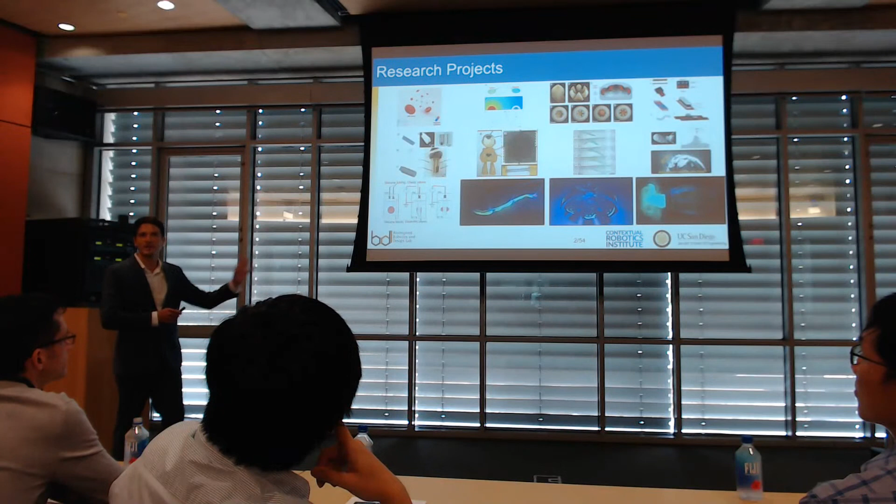I found fluorescence to be an interesting research tool, and also it's kind of captivating. So if I was an artist, this would be my fluorescent period, which is what we're going to be talking about today.

All right, so why soft robots? Why soft swimming robots? If you want to study something underwater, it's often dull, dirty, or dangerous to send a diver there. So instead, many times we opt to send robots, such as autonomous underwater vehicles, or AUVs, like this one in yellow on the left, or ROVs, remotely operated vehicles, like this one on the right. This allows us to send a robot instead of a person to do jobs that are too dull, dirty, or dangerous for people to do themselves.

The trouble with sending these big AUVs and ROVs is that they're made out of rigid materials. They can be quite large, and they're often driven by propellers or jet thrusters. Some of the challenges with these are that the propellers, for example, could get entangled on kelp or tethers. They could also cut marine life. If they run into something moving at a high rate of speed, they might damage or crack a coral reef. So we're looking at bioinspired actuation approaches to eliminate the need for jet propulsion or propellers, to try to obviate some of these problems.

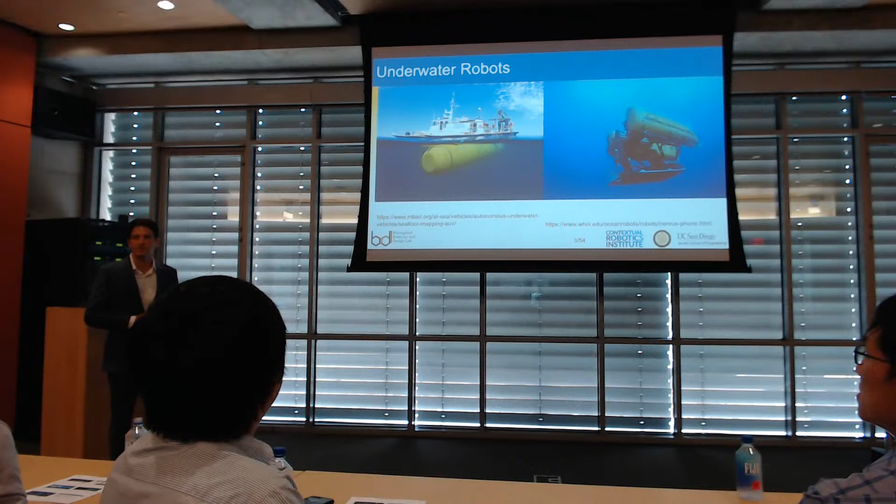It pumps fluid into the arms of the jellyfish and causes it to swim through the water. A lot of soft robots are based on hydraulically or pneumatically actuated robots. Some of the challenges with these are that you need a pump on board, which can take up size and weight, and consumes a lot of power. They can also be quite noisy, making a lot of noise and vibration.

So if you want to study something underwater that is sensitive to noise, if you're trying to measure acoustic signals underwater, or if you're trying to sneak up on a fish, if you have something with a pump running, you might scare it off before you get close to it.

So we looked at three different animals to serve as inspiration for our robots. The first is the eel. Eels are able to swim for a long period of time because they don't use a lot of energy while they swim. What's interesting is, would anybody believe that there are transparent eels? Have you seen a transparent eel that you can look right through? If you don't believe me, I'll show you here in a little bit.

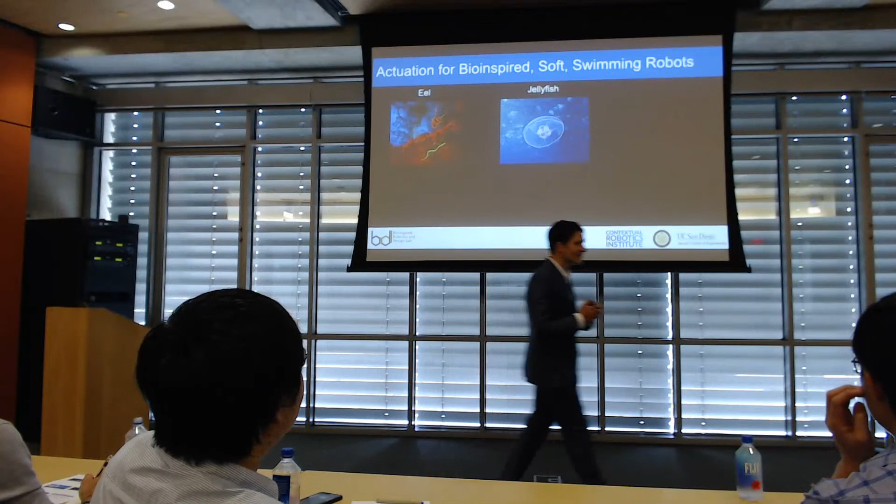So what about, does anybody know what the fastest swimming animal is? The fastest animal? Shark? No. Oh, let me clarify - what is the fastest invertebrate? There's like three choices, and I've already hinted at the animals we're talking about. Squid, that's right.

Or cephalopod - I'll generalize and just talk about cephalopods. The squid is the fastest invertebrate, and there's a few ways it does it. If it wants to swim using jet propulsion, it will hyperinflate its body to suck in a bunch of fluid, and then it will squeeze out the fluid, doing this in intermittent bursts so it can swim through the water.

It also takes advantage of the added mass effect, which means that as it hyperinflates it gets bigger, and as it squeezes out water it becomes smaller. So you get an acceleration where you can change the size of your body while you swim. We'll talk about that here in a little bit.

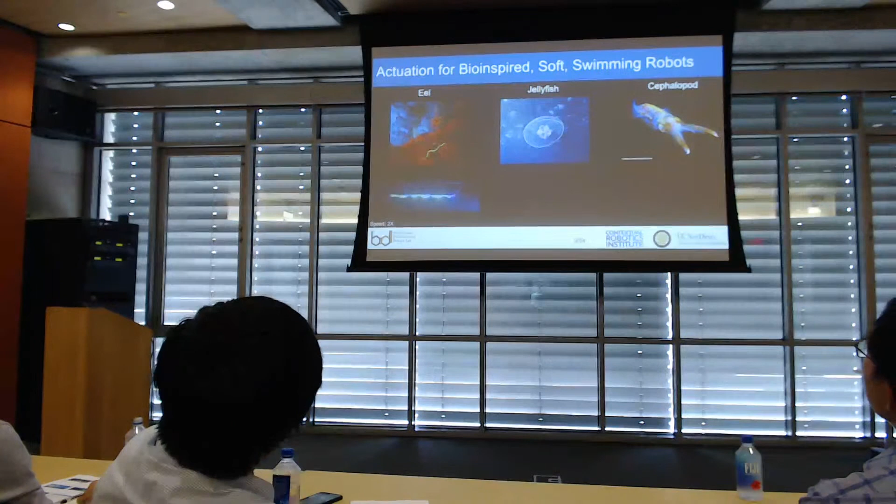So those are the inspirations for these three projects. We have the eel-inspired robot I talked about, the jellyfish-inspired robot I'm going to talk about, and lastly our squid-inspired robot.

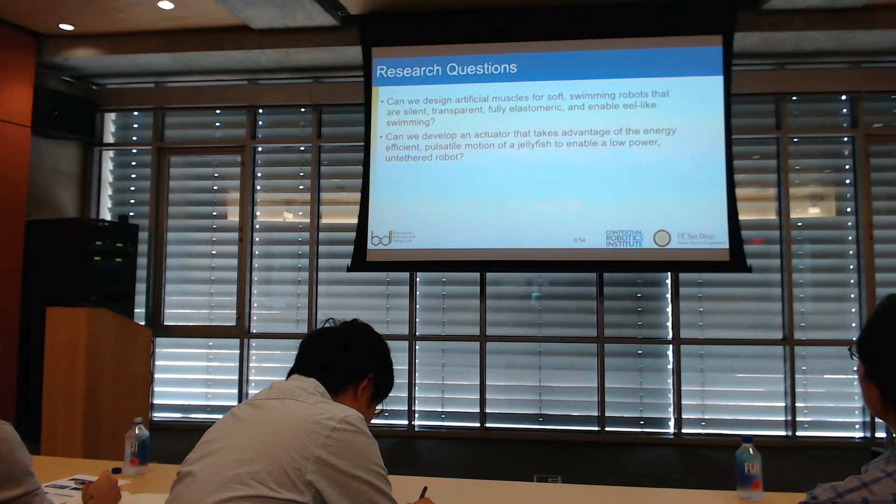The questions that I had are: can we design artificial muscles for a soft swimming robot that are silent, transparent, fully elastomeric, and enable eel-like swimming? Can we develop an actuator that takes advantage of the energy-efficient pulsatile motion of the jellyfish to enable a low-power, untethered robot? And can we demonstrate an actuation strategy for a squid or cephalopod-inspired robot that takes advantage of both pulsatile jet propulsion and the added mass effect?

I'm going to go into each of these here in a moment. If we want to make artificial muscles for soft robots, we want to use a type of actuator that has similar properties.

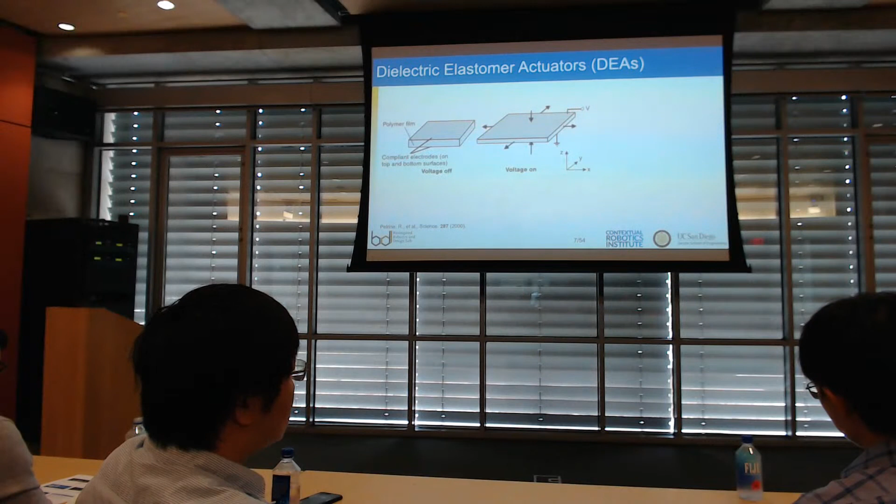The actuator that we chose is called the dielectric elastomer actuator, or DEA. It works like this: a DEA is a rubbery film, so it's an elastomer. On the top and bottom of the film you have conductive compliant electrodes. As you apply a voltage to the film, electrostatic forces compress it, so it becomes thinner. It also increases in area, so it becomes thinner and more spread out.

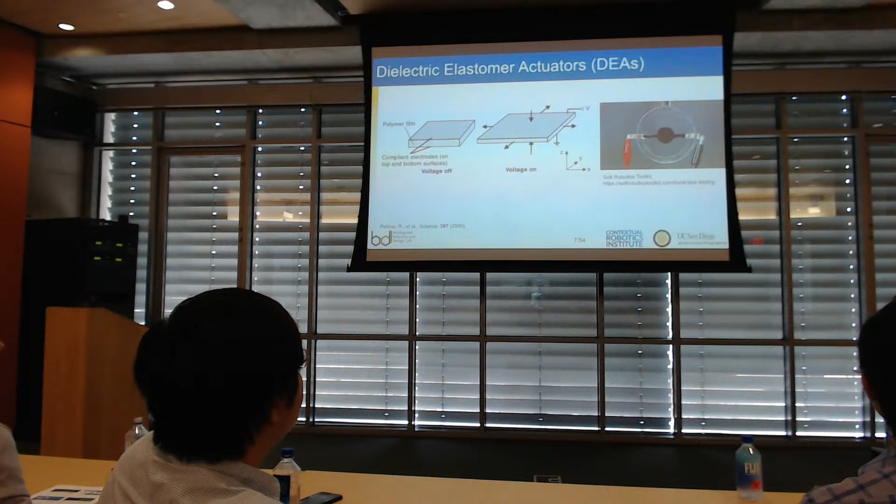Here's a video of one of them working. The transparent section around the outside has a rigid ring, and then there's a transparent film, and the black part is where the electrodes are. They're applying a voltage of maybe 5,000 to 7,000 volts to get this actuator to move.

The pressure that you can generate with these actuators goes as epsilon r, which is the permittivity of the material, times epsilon naught, which is the permittivity of free space, times the voltage that you apply divided by the thickness of the actuator squared.

The strain that you get, the amount that it moves, is equal to nu, which is the Poisson's ratio, the ratio of how much it deforms in one direction, times the same components we talked about earlier, divided by the Young's modulus.

So this shows that if we want large pressures or large strains, we have a few different variables to work with. The first one is the permittivity of the material, so we can select a material that has a high permittivity. The materials we're working with range anywhere from 2 to 4.7.

The voltage that we apply - you'll also see that voltage and thickness are squared, so there's a higher dependence on the voltage and thickness of the material than on the permittivity. But the voltage you can apply is limited by the breakdown strength of the material - how much voltage it can take before it sparks and breaks down.

Then there's the thickness of the material. The materials we work with are usually anywhere from 50 microns to a millimeter in thickness. The Young's modulus is something else we can select for.

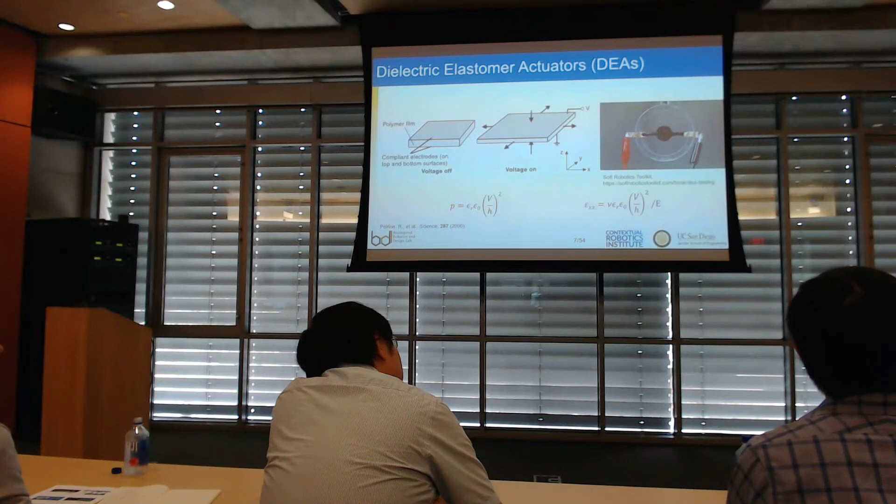If we want to make something like a muscle, we can compare different types of actuators to natural muscle. One way is a qualitative comparison across these categories: strain, actuation pressure, density, efficiency, and speed of response. Natural muscle is rated as good across all these categories.

If you look at other types of actuators people use, like electromagnetic, it's good for strain and pressure - you can get a lot of pressure with motors, for example - but they're very heavy, so they're very dense. They also work better at high speeds than low speeds, so they're not as efficient across a broad range of speeds like natural muscles.

But if you look at dielectric elastomers, they have similar performance to natural muscles. So it's a good choice for making artificial muscles for soft robotics.

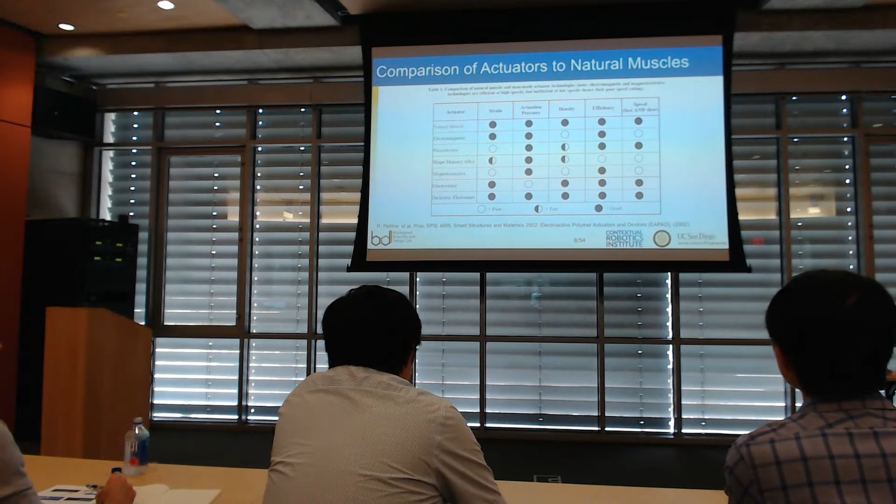If you take a rubber band and stretch it, this is what the force as a function of stretch would look like. On the y-axis we have force, and as you apply more force, it starts stretching out more and more. It doesn't take a whole lot of force to stretch out a rubber band until you get toward the end, or the stretching limit of the rubber band.

At low stretches, one way of thinking about this is if you have two balls of chain with a spring in between. As you pull on either end of the chains, you're just unraveling each ball of chain, which doesn't take a lot of force. Once you get to the spring and it becomes taut, it takes more force to pull the spring apart.

That's one example of how to describe what we're seeing here. It's very easy to pull at low strains, then as you get farther apart it takes more force as you're pulling its covalent bonds.

For these actuators, remember the pressure goes as the inverse of the thickness. So what's happening is that if you apply a constant voltage, you're generating a feedback loop - as you apply a constant voltage, you're making the actuator thinner.

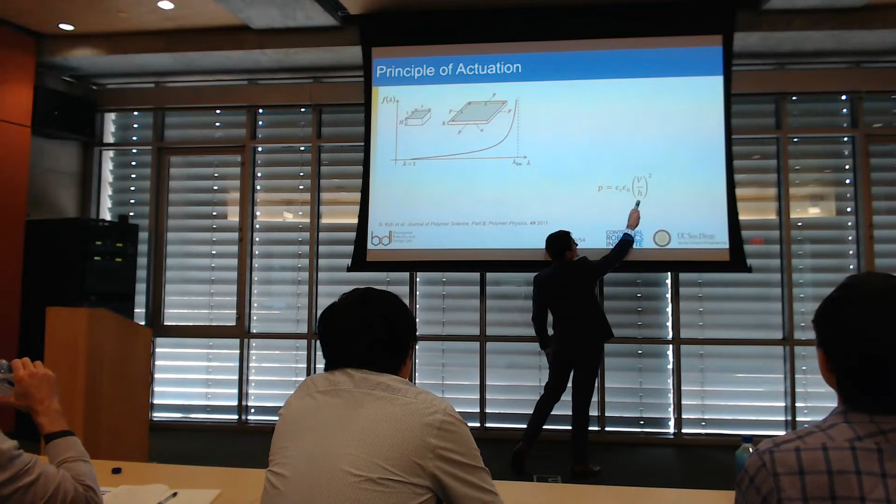So if you apply a constant voltage, you're generating a pressure, which makes the thickness thinner, which then increases the pressure, which then increases or decreases the thickness even more. So you're generating this positive feedback loop. And so then the curve, if you plot the voltage as a function of the stretch of the material, it looks more like this. It takes a certain amount of voltage to get it to deform a little bit, and then after a certain point, it'll start feeding back.

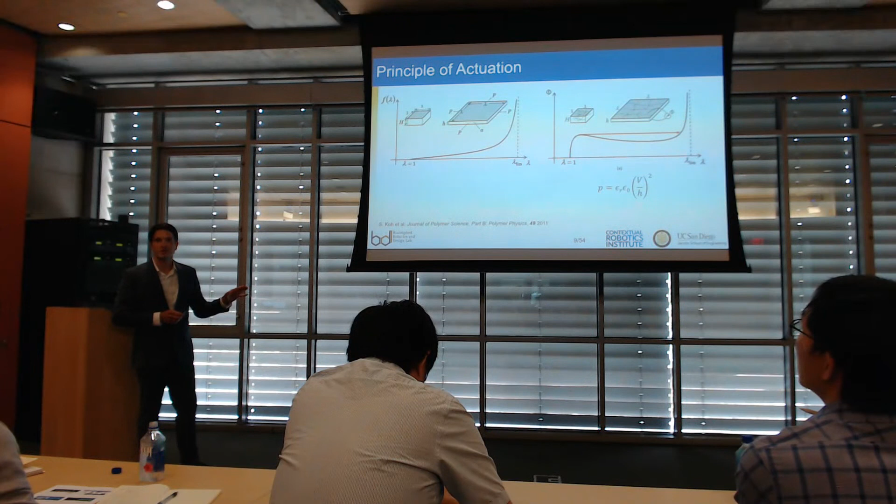But then researchers found that if you stretch the material ahead of time, you can change when the material will break down, and you can get improved performance by it. The challenge is that once you stretch the material, you need to apply it to a rigid frame. If you apply it to a rigid frame, you can get better performance from your DEA, but then you no longer have a soft robotic option, because you have some plastic or metal implements in there too. So we're trying to look at ways of getting large actuations from these actuators without using pre-strain.

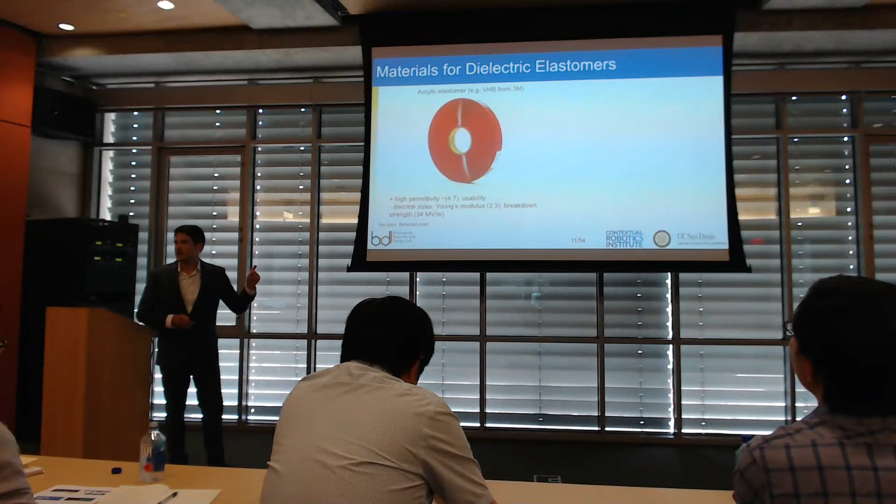So the two materials that people normally use for DEAs: one is an acrylic-based elastomer, and a very popular choice is VHB. It has a high permittivity, and it's also very easy to use, so it comes on a roll. I've got some examples of it over there. But the challenge with this material, even though it's widely used, is that it comes in only discrete sizes, so you can only get it at a few different thicknesses. It has a high relative Young's modulus and a low breakdown strength.

On the other hand, other people choose to use silicone-based elastomers, so this is PDMS. Many groups use this for microfluidic chips, and you can also use it for DEAs. With PDMS, you have better control over the thickness, because you can spin coat it and get really thin layers. It also has a lower Young's modulus, so you can get higher stress or strain rate, and it has a higher breakdown strength, so you can apply more voltage when you're trying to actuate it. The trouble is that it has a lower permittivity, almost half as much as VHB. So in our work, we are focused mostly on VHB because it's very easy to prototype with, but for further improvements, we might move to maybe more silicone-based.

Okay, but we forgot the units on the left here, right? So this is also megapascals? Yes, that is true. That's the type of thing. Yeah.

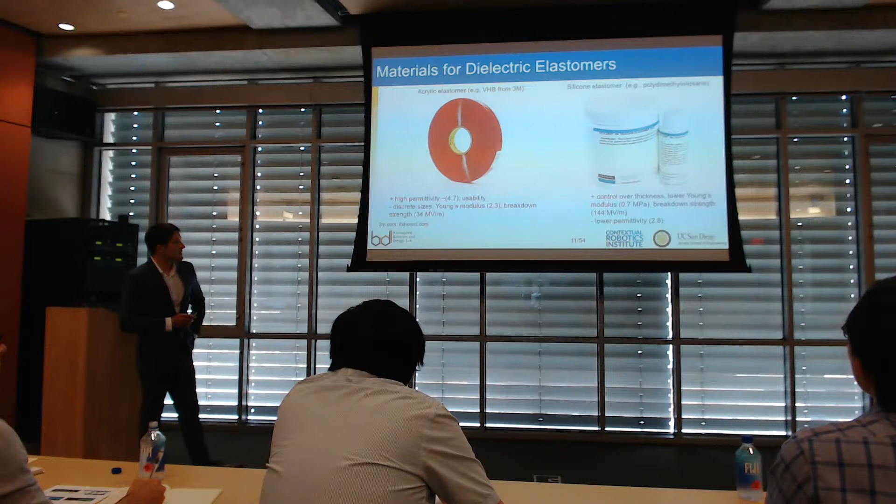Instead of carbon-based electrodes, another issue is that if you want to make something that swims underwater, you need to encapsulate it from the surrounding water, or else it will short out. So many groups use carbon-based electrodes for DEAs but have to add an additional encapsulating layer on the outside to keep it from shorting out to the water. With carbon-based electrodes, you generally get a stiffer structure.

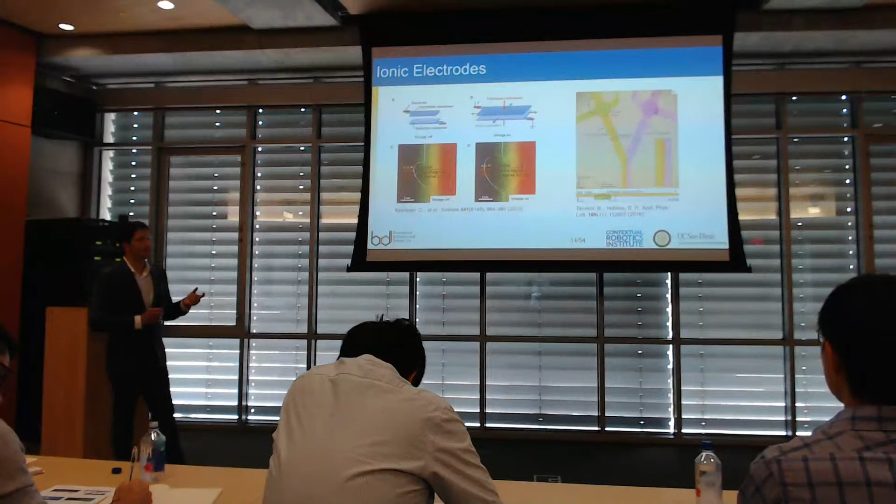We wanted to see if we could make a soft robot that would be transparent like the eel. So instead of using carbon electrodes, we use ionic electrodes. One example from Harvard uses an ionic hydrogel to show high-speed actuation. Another group used water as the electrode in a microfluidic strip to apply electricity. But up until now, nobody's used water as electrodes in a robot.

I told you this question at the beginning, so I'd like to show some of the hypotheses we're trying to test with this robot. First, that we can use water for both electrodes in a DEA. At high voltage, we can even use pure or nearly pure water to be conductive enough for actuation in a DEA. And that DEAs without pre-strain can generate enough force and strain to enable underwater propulsion.

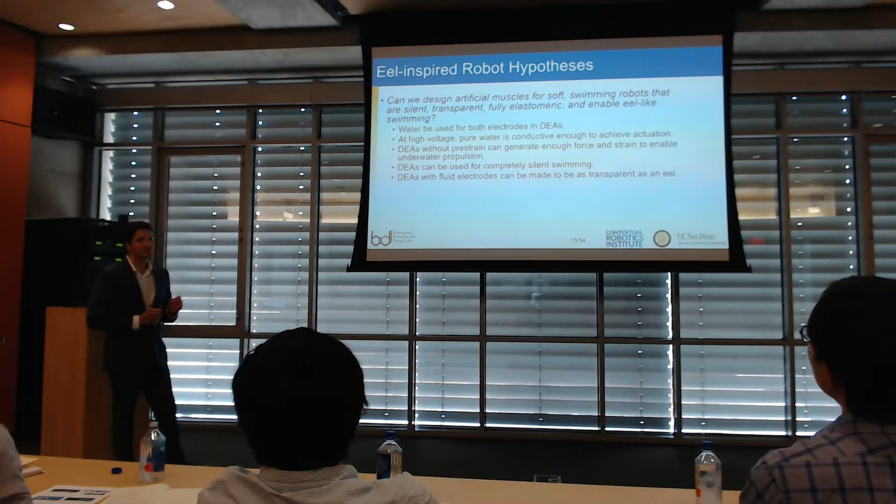DEAs can be used for completely silent swimming, so you won't have the motor noise you'd get from an ROV or AUV. DEAs with fluid electrodes can be made as transparent as an eel. And lastly, for fun, transparent fluid electrodes can enable fluorescence.

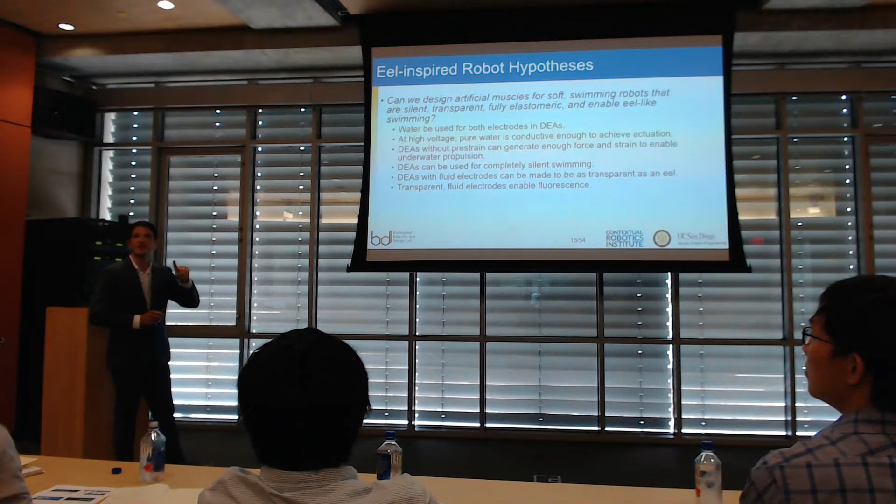Also, if you notice it's shaking, it's because the construction is vibrating the projector. So it's not you, it's the projector.

Lastly, a series of bimorphic DEAs can generate eel-inspired undulating locomotion. So how do we do it?

I made a bimorph actuator for the eel-inspired robot. The bimorph means it can bend in two different directions. We put this in a tank of water that's grounded, connected to ground. Then we have fluid pouches inside this actuator. In green here, this is water, and there are 3 layers of a dielectric elastomer.

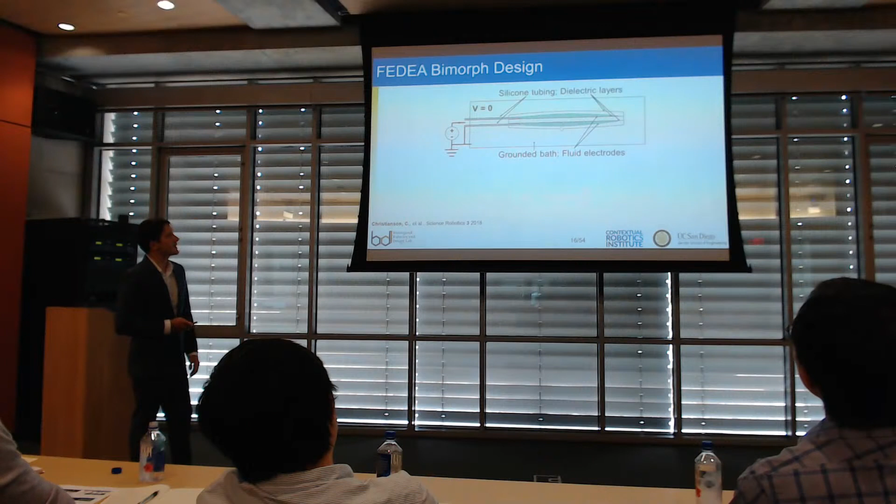As we apply a voltage between one of the pouches and the outside water, it will compress the actuator on one side and cause it to bend that way. Or we can apply the voltage to the other actuator to bend the other way.

To test this, we put it on a simple test stand and applied voltage to guide its movement. We can control the direction of bending based on which pouch we apply voltage to, and control the magnitude of bending based on the amount of voltage applied.

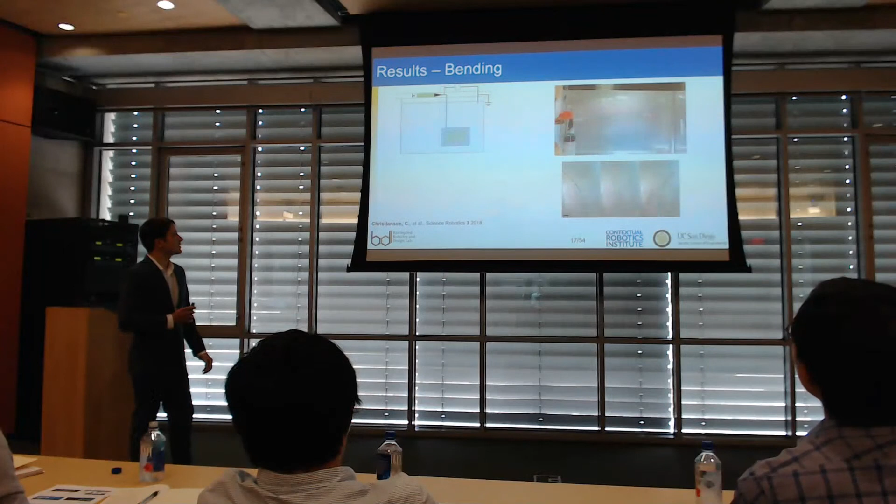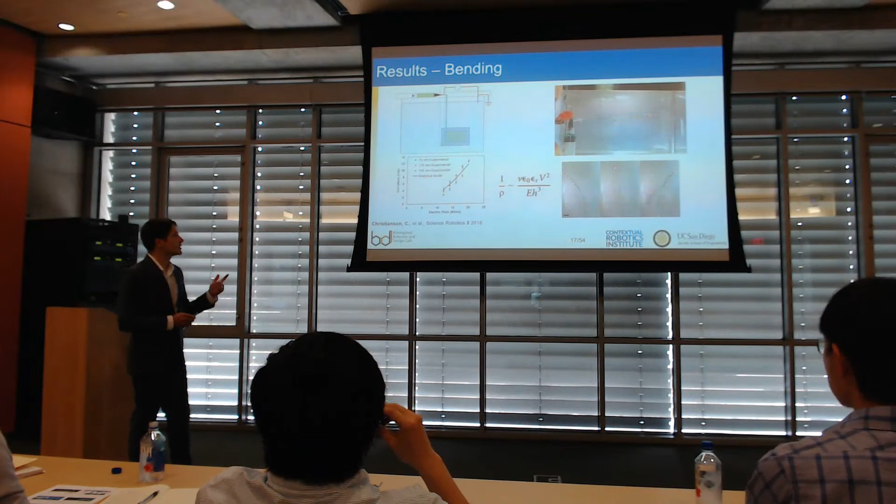We also compared this to an analytical model showing that the curvature should be proportional to the Poisson's ratio times the permittivity times the voltage squared, divided by the Young's modulus and the cumulative thickness. Our experimental results match up pretty well with the model.

We also wanted to see if we could get this to swim through the water. This is tethered swimming with a single bimorph actuator. I'm applying voltage to both sides of the actuator to get it to wiggle its way through the water. The trouble is that to get an asymmetry and swim forward, we needed to make part of the actuator more rigid than the other part.

So we put a zip tie on the front to provide some asymmetry, and it mostly swims when it can kick off the surface. It's kind of like an inverted water strider. So that works.

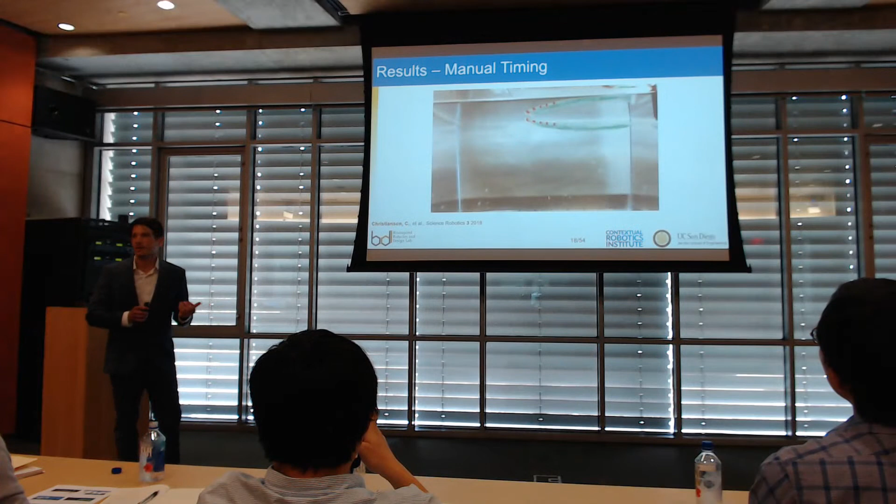I said that we can make it silent, so we put a hydrophone in the water next to the actuator and compared the signal when it was on versus off. The level as a function of frequency over the audible range shows that you basically can't hear the actuator, so it's completely silent.

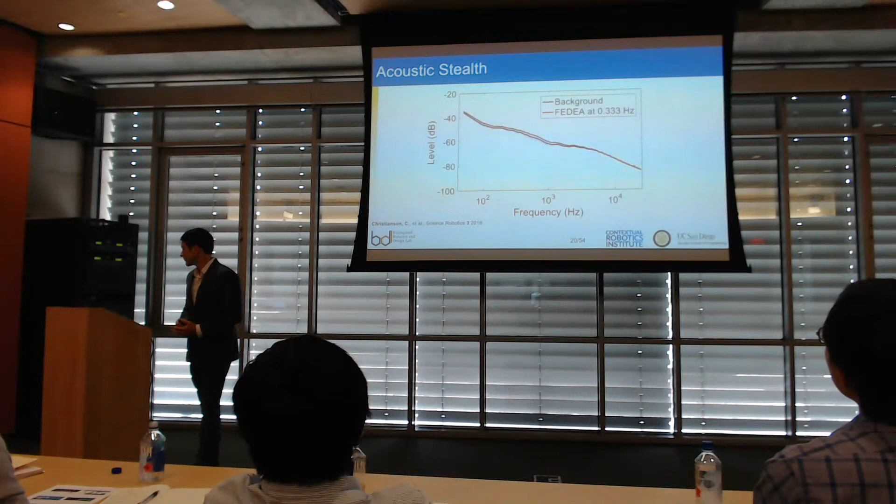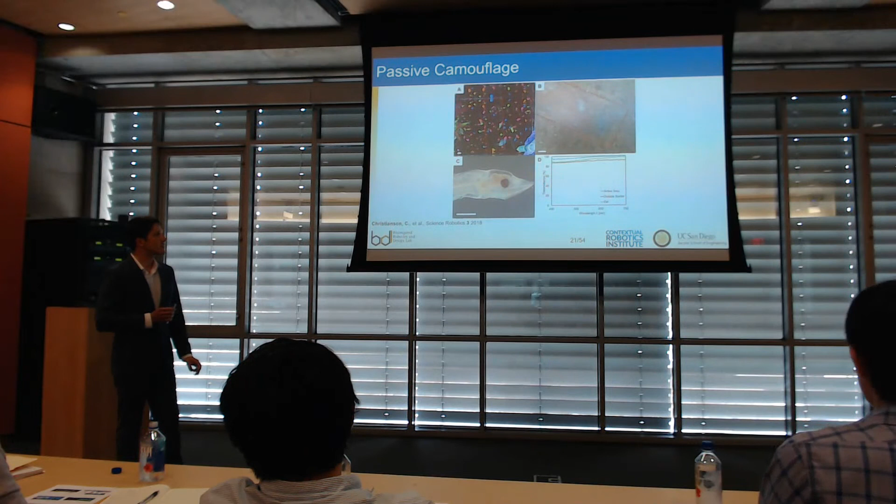So if it's transparent, we want to see if we can do something interesting with it. We found that there are eels in nature that biofluoresce. Under moonlight, they will glow, or fluoresce—bioluminesce. We wanted to see if we could capture that with our robot as well.

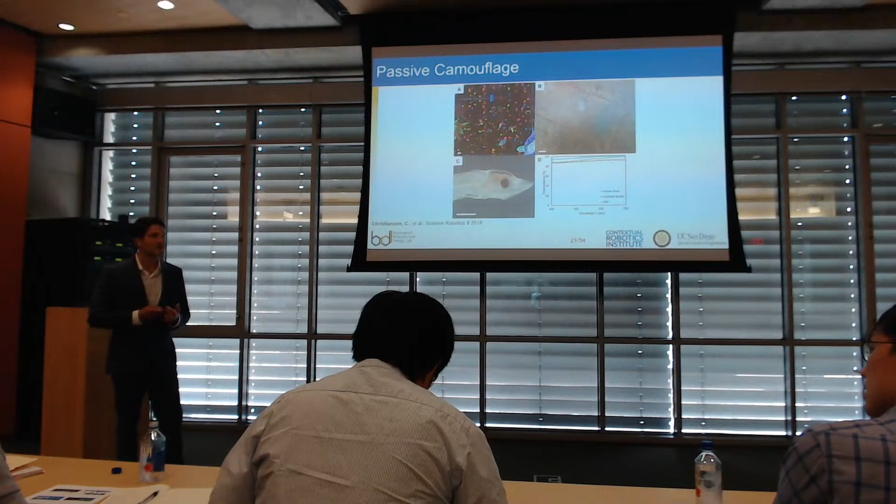So we loaded our robot with a fluorescent dye, then stimulated it under black light and showed that we could get it to glow. One reason researchers believe eels have this ability to fluoresce is so they can find each other at night during spawning events.

Now that we made it, we want to make it swim. The way we made it swim was that a single actuator wasn't enough without having some other force to kick off of.

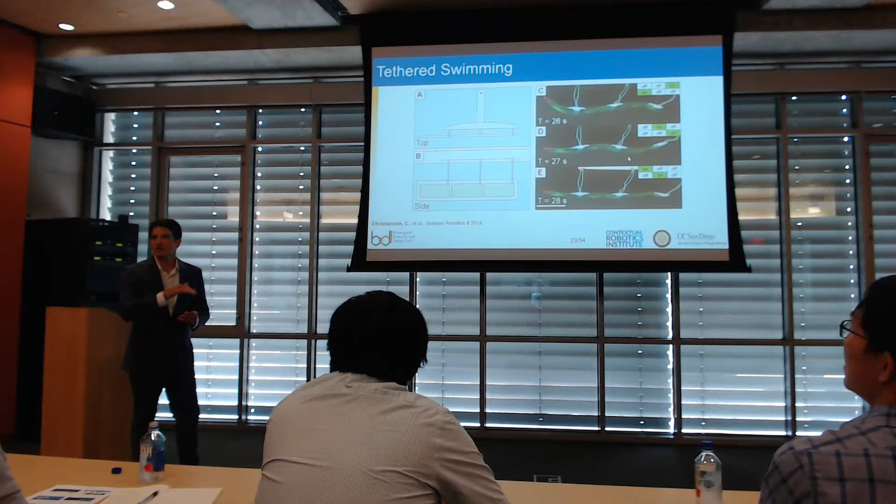Here's a video of it swimming. This is at 2 times speed. The average speed of the robot was about 2 millimeters per second.

One thing you'll see here is that the robot is tethered, with 2 tubes coming from each of the actuators going to a swinging platform. One way we wanted to quantify how well this could swim is that if we just suspended it directly from its tubes, it would swim like a pendulum, going fastest at the bottom and slowing down as it starts pulling against the tethers.

So instead, we suspended it from a floating arm so it could swim at the same depth around a slow arc. That's what you see here. Then we turn on the black light for it to fluoresce while it's swimming as well.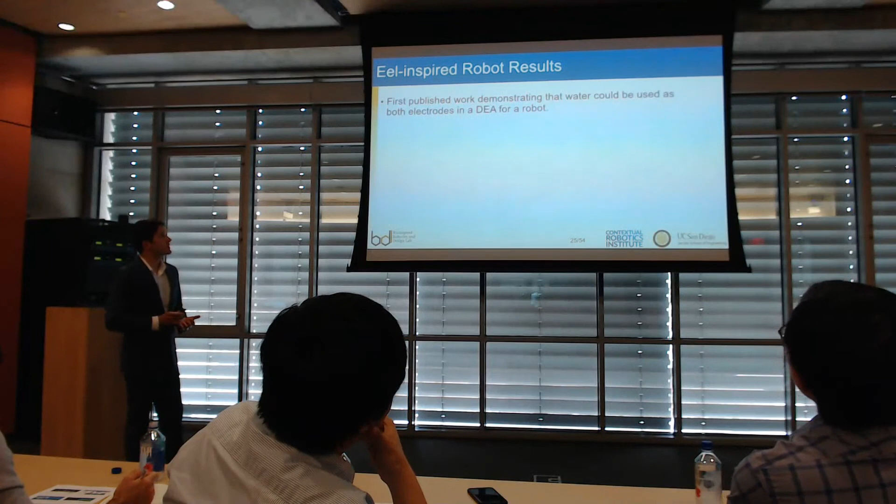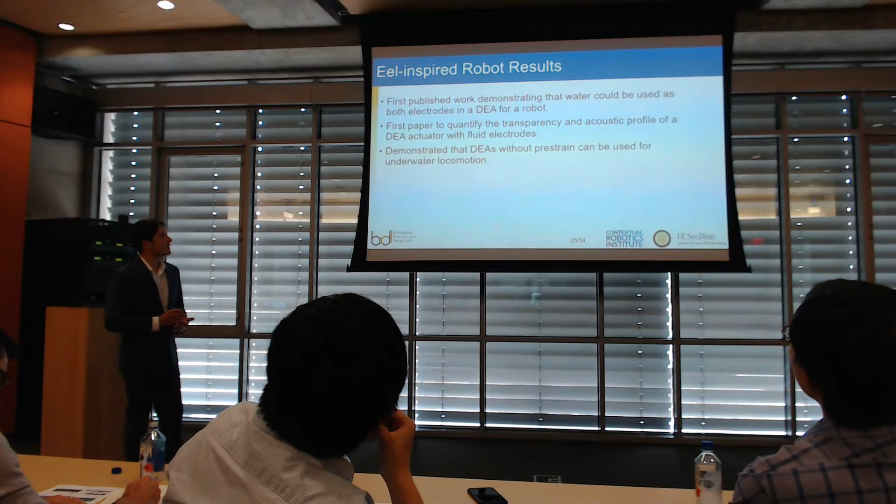The results of this project are that we were the first published work demonstrating that water could be used as both electrodes in a DEA for a robot. We're the first paper to quantify the transparency and sound of a DEA with fluid electrodes, and we demonstrated that DEAs without pre-strain can be used for underwater locomotion.

So switching gears a little bit. What we had there was a tethered robot that needs all the electronics off of it, because the electronics were pretty bulky to get that control sequence. As an electrical engineer, maybe I could make it smaller using a PCB and all that, but instead we could design a similar actuation strategy.

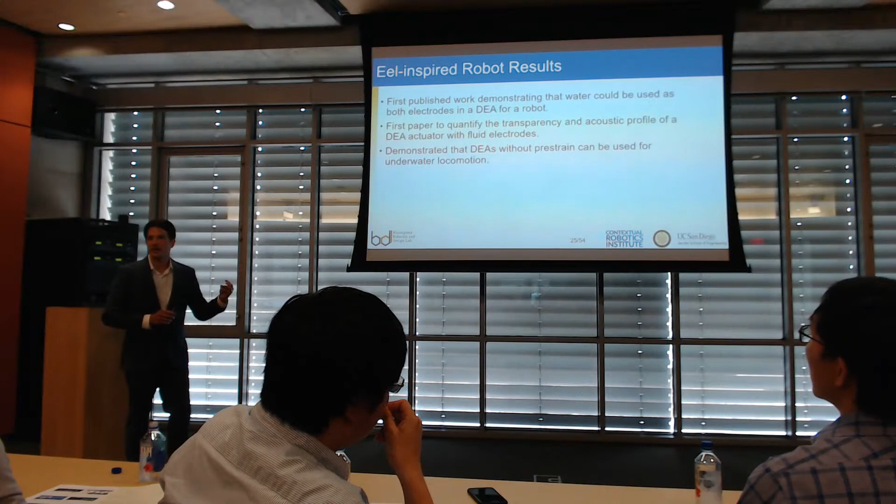So we looked at jellyfish, which only needs actuation to contract the bell of the robot, and then it can passively relax. Here's a video of a baby jellyfish swimming, so you can see how it moves. It contracts these muscles, causing the bell to contract, pushing out water.

And the jellyfish, in terms of cost of transport, which is the amount of energy it takes to swim a unit mass a unit distance, you can see we have running and flying, and then different types of swimming in blue. There's squid, and then fish, and then jellyfish are the most efficient swimmers across all dimensions.

So the way we wanted to do this was design this jellyfish-inspired robot. Our hypotheses are that unimorph actuators based on DEAs with a strain limiting layer, a layer that's inextensible, can enable pulsatile motion, inspired by the motion found in jellyfish, and that the simple control strategy of the jellyfish enables untethered propulsion. The way we design these actuators is similar to the bimorph actuator, but a little bit more simple.

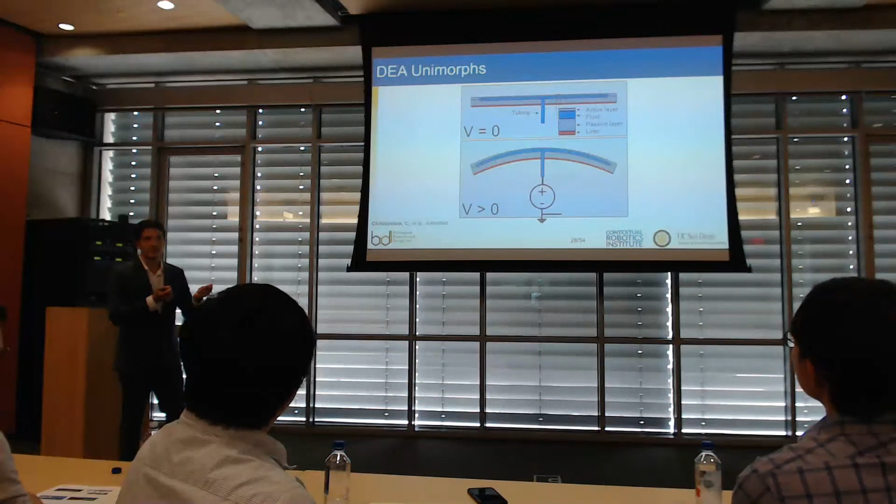This is suspended in a tank of water, so the water is grounded. On the top we have the dielectric elastomer layer, then a fluid pouch, and then a passive elastic layer that the dielectric elastomer sticks to. Underneath that, in red, we have a strain limiting layer, which increases the amount of force we can get for each stroke. We have tubing that goes to our electronics. So when we apply the voltage, it expands the dielectric elastomer and causes it to bend towards the strain limiting side.

The way we designed this is we wanted to make it layer by layer, the same way we made the eel: make each layer at a time and then stack it together. But if you want to make a ball out of planar sections, you have to be a little bit more creative. So we took a hemisphere in CAD, took one eighth of that hemisphere, flattened it, and designed it as an axisymmetric array.

What this should enable is we can make it flat, and then when we pick it up, it should fold back into a hemisphere shape. I showed the two different regions of the DEA: the inside is the active area in the center, and around the outside is this passive border that allows the actuator to bring the DEA film to stick to itself and contain water.

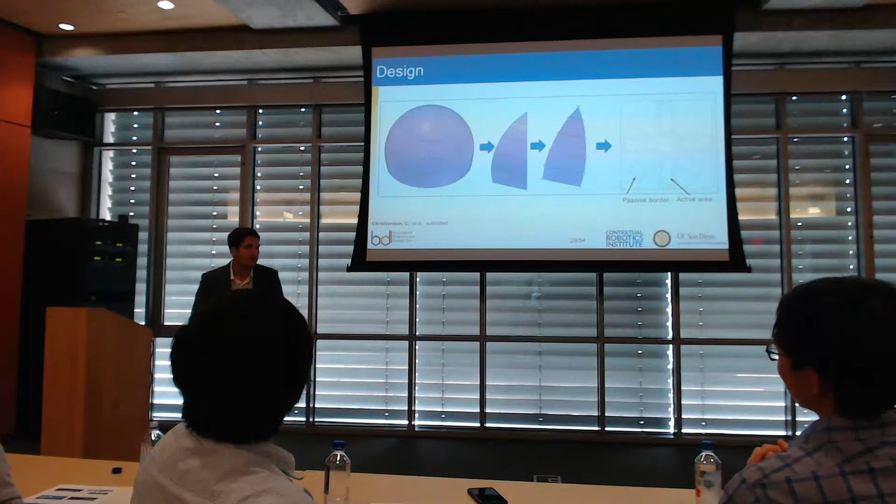So for one eighth of the hemisphere, it is a non-developable surface, a mechanical engineering term. Can you make it flat without stretching it? No. What is this material made of, this active and passive border? The acrylic elastomer, VHB. Oh, so there is some stretching.

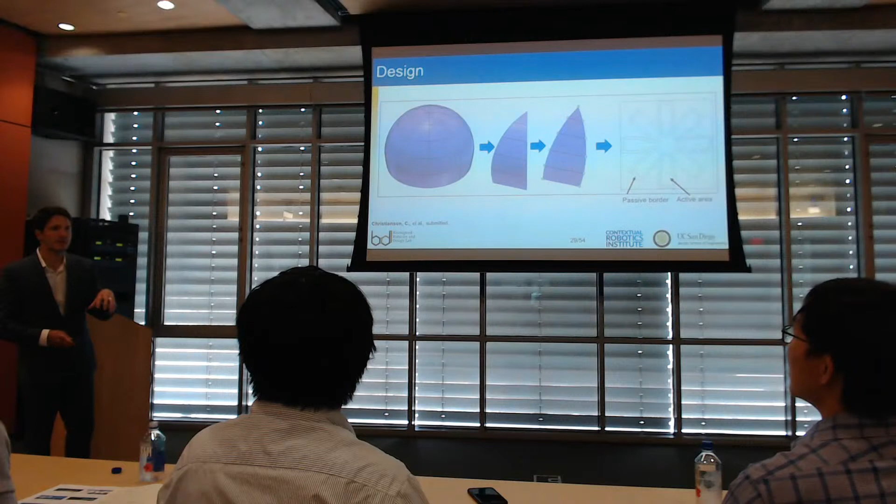The question is how is the second one, the third one. Oh, this is without actually stretching? No, this is in CAD. I'm showing you how I designed the layout of the actuators. The first three sections are all in design, and then I use that to design the shape of the actuators. So when I make them flat, I want something that approximates a hemisphere when I pick it up. I'm not making the first three out of the film, I'm making the last one, and I'm using the last one as a mask for the film. The key point is starting from the second, it is curved. Right, if you want to make the third one flat, you have to stretch it. If you do not stretch it, you cannot make it flat. That's the key point.

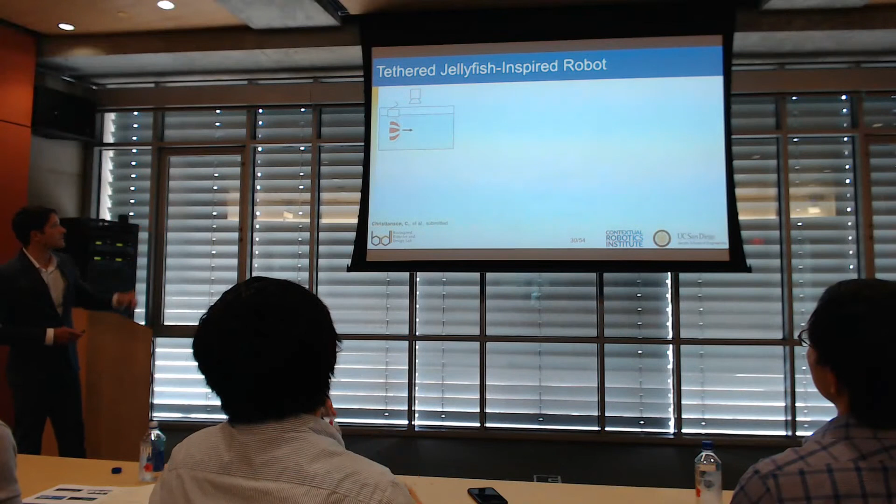So we wanted to see, once we made it, we wanted to get it to swim. This is a schematic of our test setup: we have a video camera above the tank, the jellyfish robot is in red, and it's suspended by its tube that goes to a float to keep it at a constant depth. There's a wire that brings it to the electronics. So this is a video of it swimming.

So the red is the strain limiting layer, and we're actuating it and allowing it to passively relax. So it's actuating, and as it does that, it will swim through the tank.

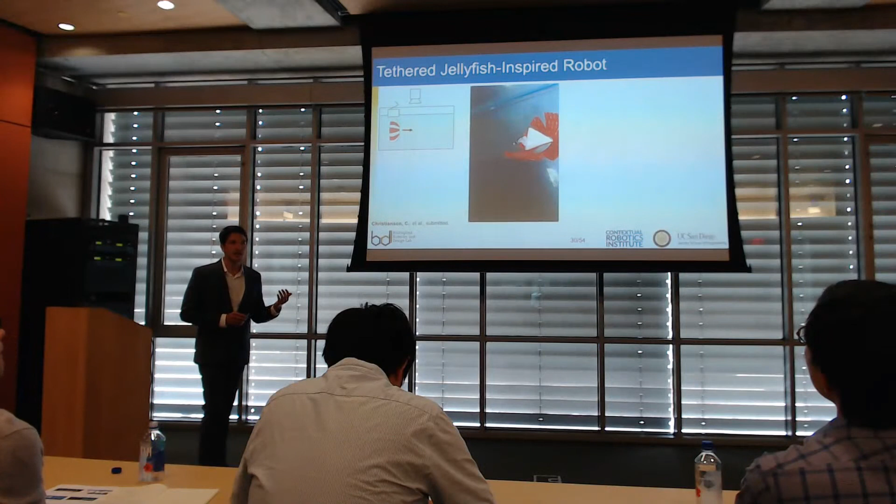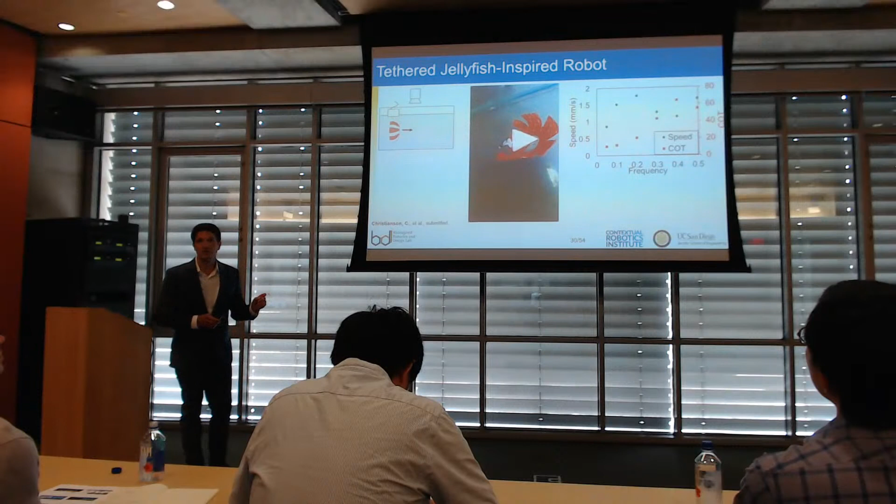We wanted to see what the optimal frequency is. For jellyfish, studies show there's a maximum efficiency if you drive the jellyfish near its resonant frequency. So we wanted to see if there was a driving frequency that would also give us the most speed. We tested the swimming, measured speed at different frequencies, and found a peak speed of about 1.8 millimeters per second at around 0.2 hertz. That's also close to the lowest cost of transport, so it's most efficient at high speed at that point.

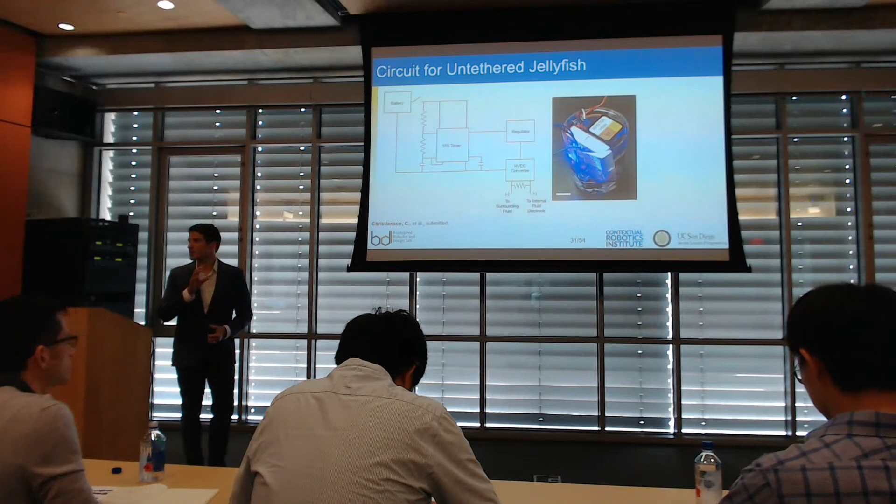For the electronics, it's based on a very simple circuit. We have a battery that goes to a switch, and then there's a 555 timer. The 555 timer creates a low voltage square wave that turns the actuator on and off, and you can control the frequency and timing of the signal based on the components for the timer. The timer goes to a regulator that keeps the voltage constant, which goes into our converter. So we send 5 volts into the converter, and on the other end we get 10,000 volts out. We have a resistor across the leads of the converter to discharge the actuator - it'll charge up the actuator, then when you turn off the voltage, it discharges through the resistor.

Here's a video of the power supply actually turning on and off. The multimeter is reading in thousands of volts, so when the light's on, it's putting out about 7,000 volts. You'll see I brought the power supply over there on the table - if you plug it in, just be careful.

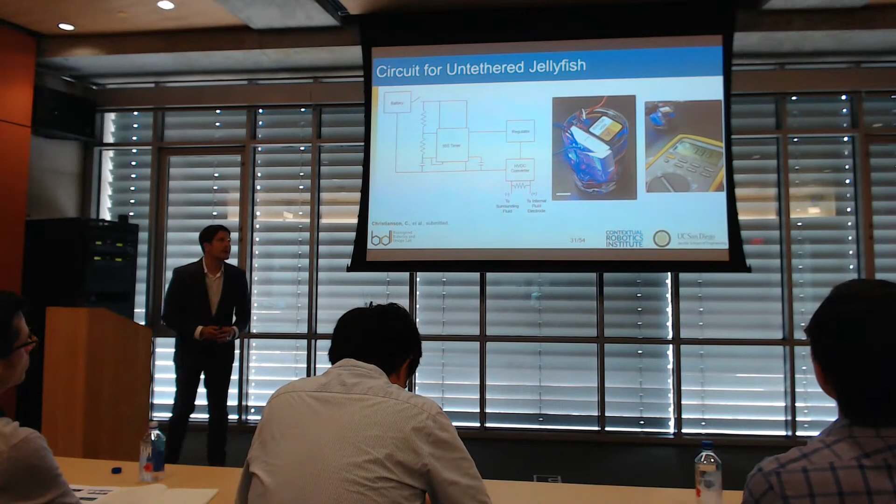We wanted to show we could connect this to the rest of the robot and get it to swim untethered. So here we are. One of the challenges with swimming soft robots is that it's very easy to get it to float because of buoyancy. So what we did is first make it slightly negatively buoyant - we added an air bladder on top to offset the weight of the electronics, but kept it slightly negatively buoyant so it falls. That's this bladder on the right. Once it fell to the bottom of the tank, we turned it on and got it to swim upwards.

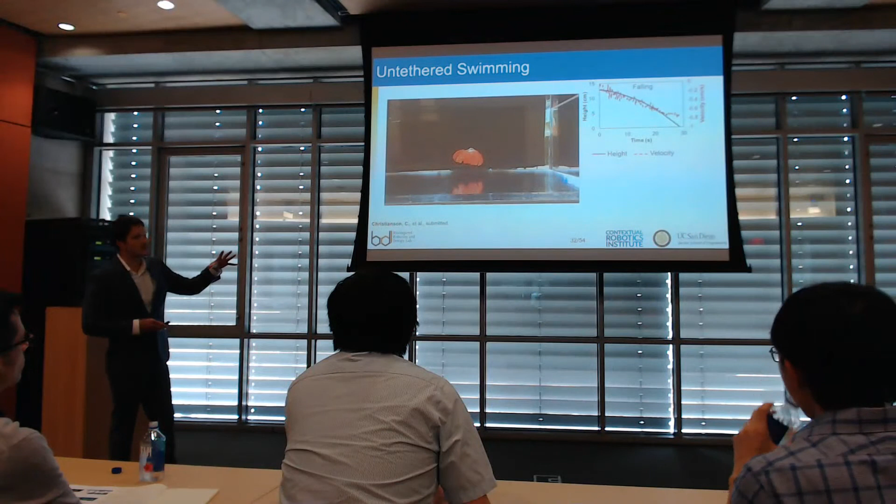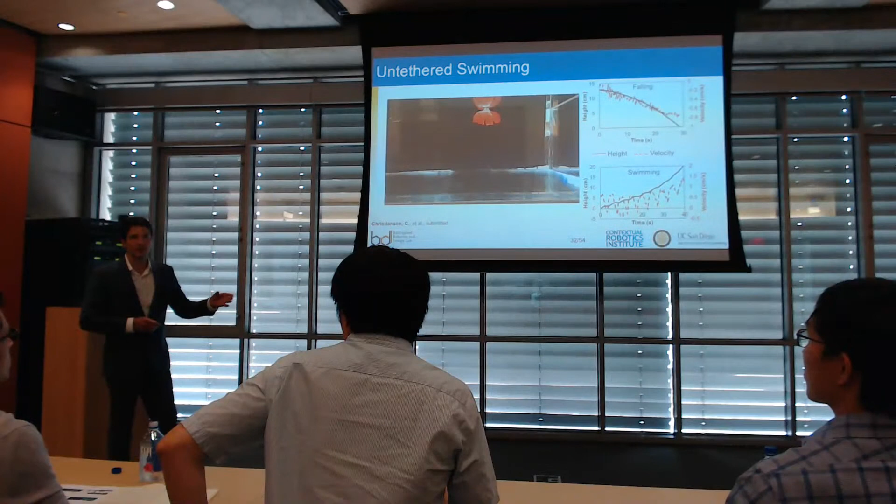For the results of the jellyfish, this is the first untethered jellyfish-inspired robot based on prestrain-free DEAs, and also the fastest untethered jellyfish-inspired robot based on DEAs. The previous record was 5 millimeters per second, and ours is a little bit faster, about 6 millimeters per second. So it's not a big improvement, but I'll take it.

All right, I want to switch gears slightly now. Actually, that might be funny to tell you in a minute.

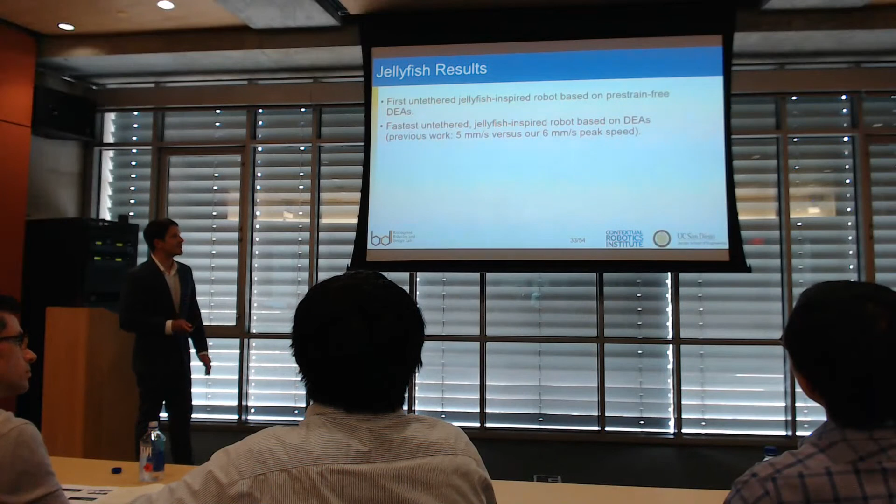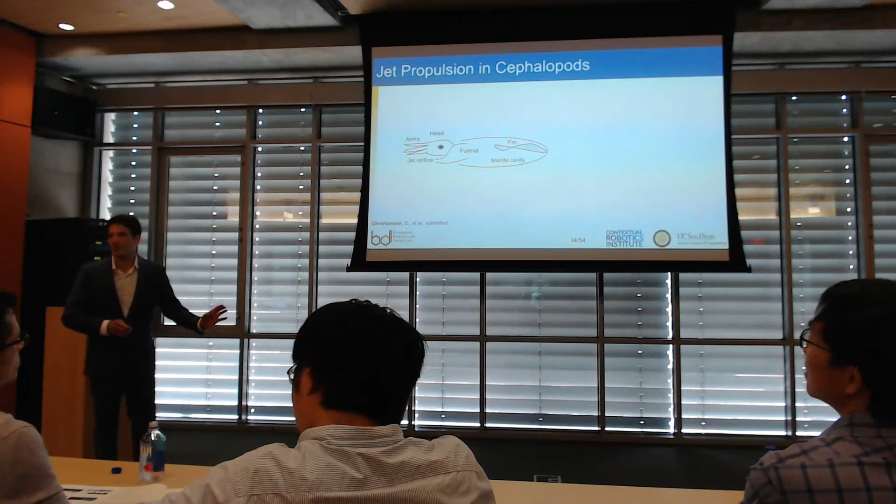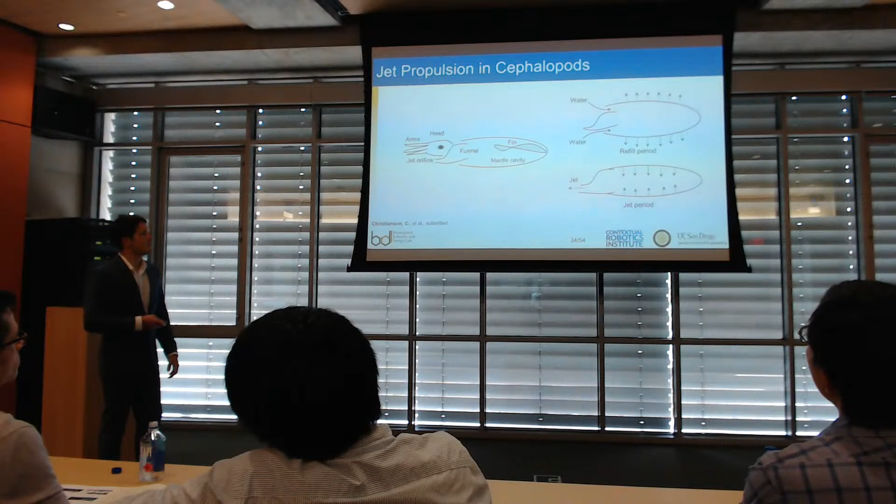To our cephalopod-inspired robot. The way cephalopods swim is they have this mantle cavity at the front - sorry, of the animal. So you have this mantle cavity, and this area here where fluid can come in. When they swim, to use jet propulsion, they hyperinflate their mantle cavity, sucking in a whole bunch of water. Then when they want to eject it, they contract all those muscles and push the water out through this funnel. The nozzle can be turned in any direction, enabling the squid to swim in any direction, even backwards.

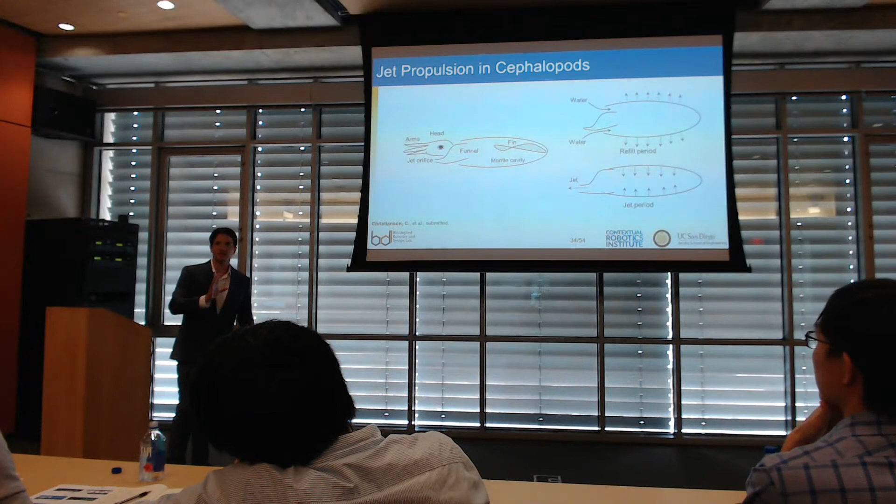I briefly talked about it earlier, the added mass effect. One advantage of having a body that can change its shape during swimming is that you get additional acceleration based on the change of your mass, or really your volume. What happens is if you're pushing a body through the water - say a ball - if it's a big ball, it's hard to push because there's a lot of fluid you're accelerating as you push it. If you push a smaller ball, you're accelerating a smaller amount of fluid that the ball is displacing. So if you can dynamically change the size or volume of the object you're pushing through the water, you actually get an acceleration from that.

I couldn't find a good picture, so that's why I got that. The other thing we were looking at is the formation number.

What this says is that if you have a pulse jet, it's most efficient at a certain ratio of the length of the jet to the diameter of the jet. One way of calculating that is the formation number: it's 4 times the change in volume divided by pi divided by the diameter of the jet cubed.

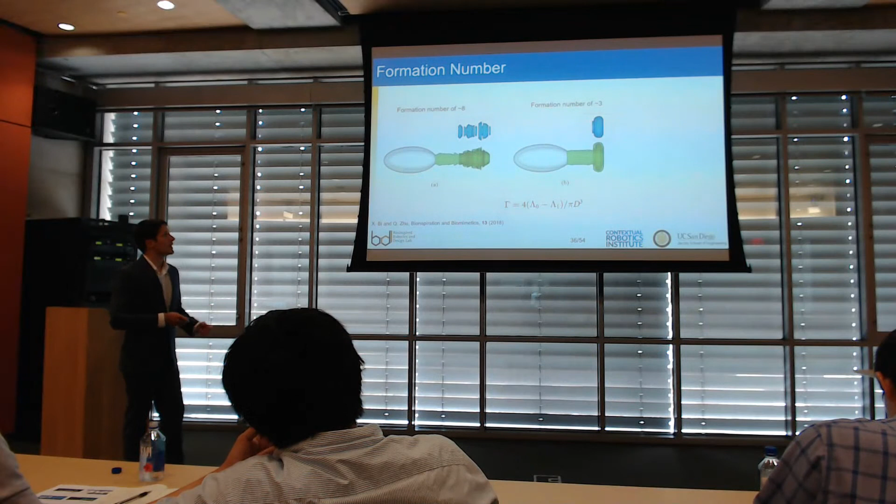What this means is that for high formation numbers, like for example for 8, you get a very disturbed, very turbulent looking jet. But what you really want is something very smooth, so you want the leading vortex to be stable and pull in as much surrounding fluid as possible to make it the most efficient. This stability happens right around 3 or 4 for this ratio.

So what we want to do is make our robot as efficient as possible. One way we can do that is by changing the diameter of the jet that we're ejecting.

The trouble with this is that it's not repeatable. Each time they want to make the swim, they have to go and hyperinflate it again.

The other one did have a cyclic actuation strategy—they have tendons on the inside that are squeezing or compressing this soft body. But this one is tethered, and if there's not a big change in the overall volume, they're not really taking advantage of the added mass effect in a big way.

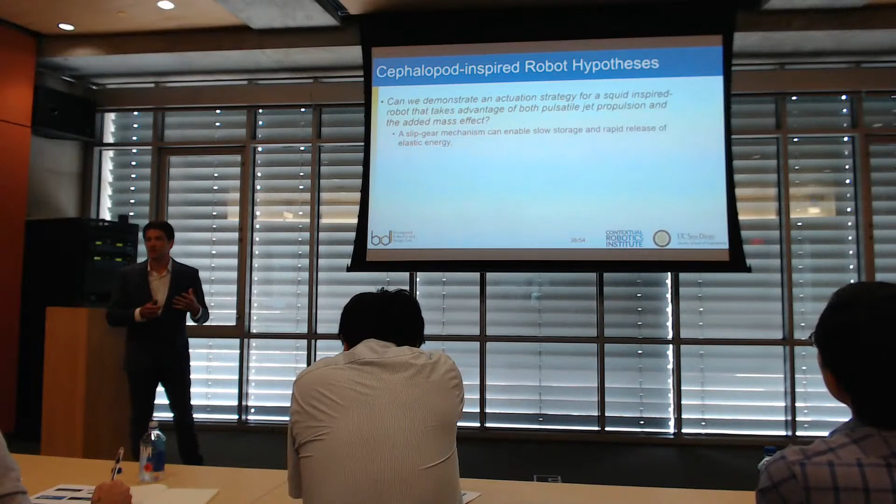The hypotheses we have for this project are that we could design a slip-gear mechanism to enable slow storage of elastic energy and a rapid release of it. We say that buckled beams and elastomeric skin can store sufficient elastic energy to drive pulsed jet propulsion, and that the thrust of the robot can be optimized for the right ratio of the formation number, or the jet length.

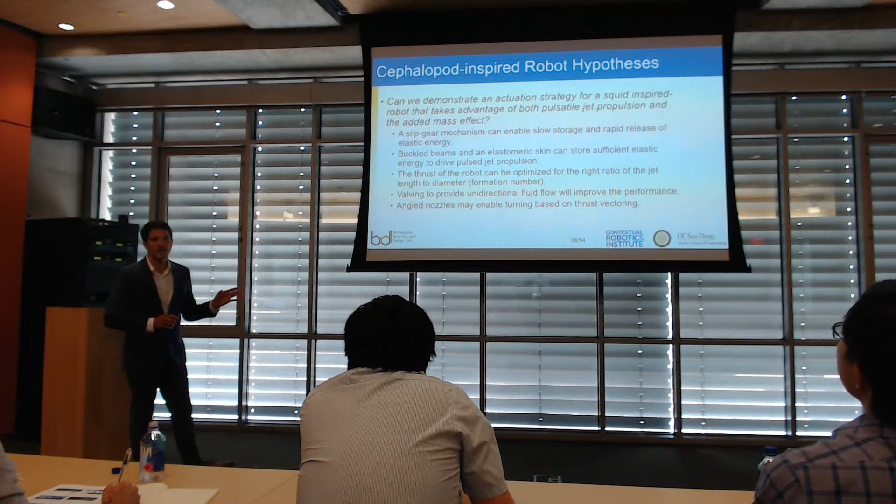And valving could be used to provide unidirectional flow, which will improve the performance of the robot. Lastly, that we could use angled nozzles to turn the robot based on thrust vectoring.

So here's the schematic of the robot. On the left-hand side we have the nozzle, and then a bottom and top end plate that are 3D printed, connected by a rack. On the bottom end plate we have the motor mount that has a DC motor with a gear on it, and the gear is missing teeth.

What happens is that as the gear spins, it will pull these 2 parts together, storing elastic energy in the flexible ribs, and then once the teeth slip, it can quickly spring back into its original shape.

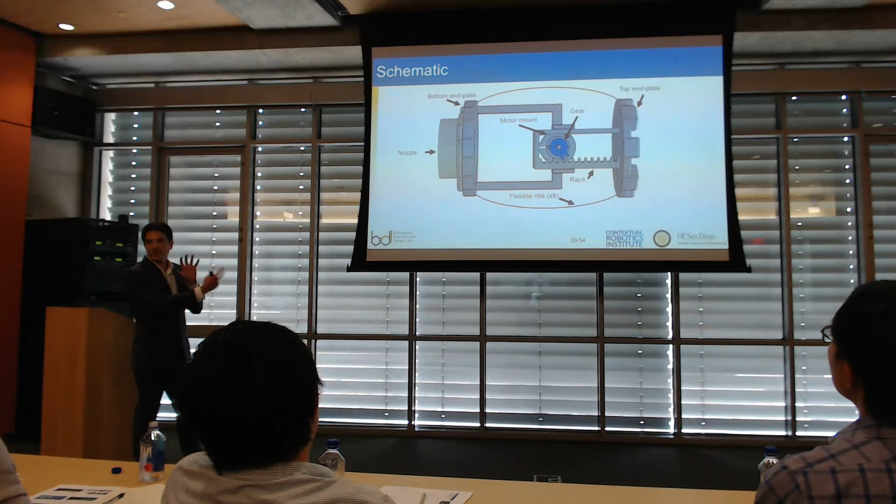Here's a breakdown of the actuation. Right now it's inflating and sucking in water, and then when the gear slips, it releases a jet of fluid and swims forward, and it will do this over and over and over.

Here's a video of it actuating. You can't quite see the gear because the ribs are concealing it, but you can see it actuating. And here's a typical example of the velocity profile normalized to time.

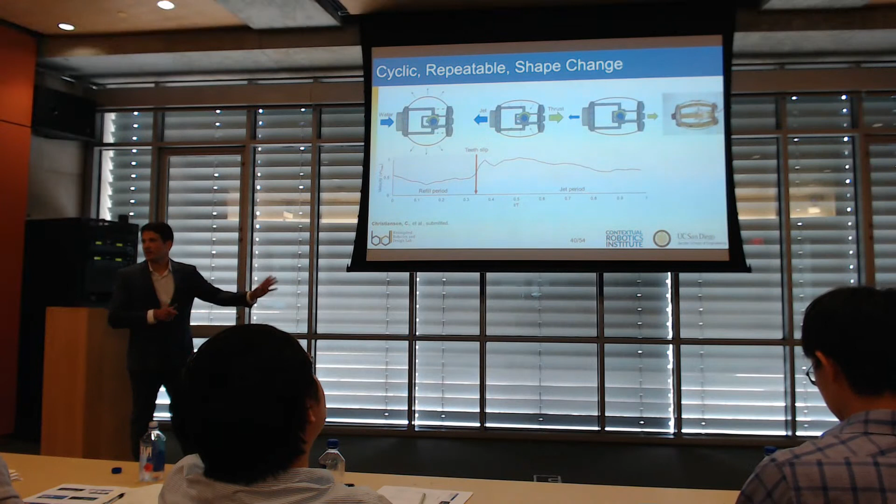During the refill period, it's slowing down as it's sucking in water, and then once the teeth slip, it starts shooting out the water and begins accelerating.

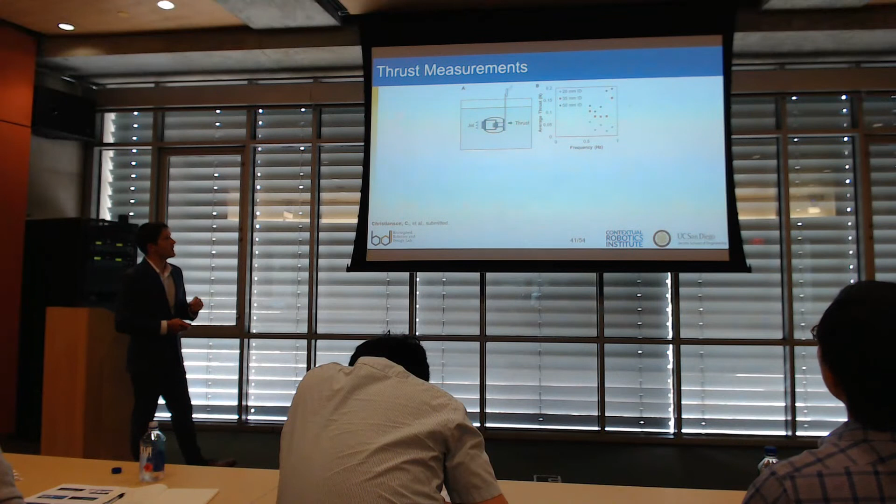We wanted to see if we could measure dependence on thrust for formation number. We tested it by putting the robot on a load cell to measure the force we can get out of it, then tested it at different frequencies and nozzle diameters. We kept the change in volume constant and tuned the nozzle diameter. For the smallest nozzle, 20 millimeters, that corresponds to a formation number of about 40, a very high formation number.

As the nozzle gets bigger, the formation number gets smaller. The black dots correspond to the nozzle that's 50 millimeters in diameter, which has a formation number close to 4. So we would expect this to have the most amount of thrust, which is what we see from this test.

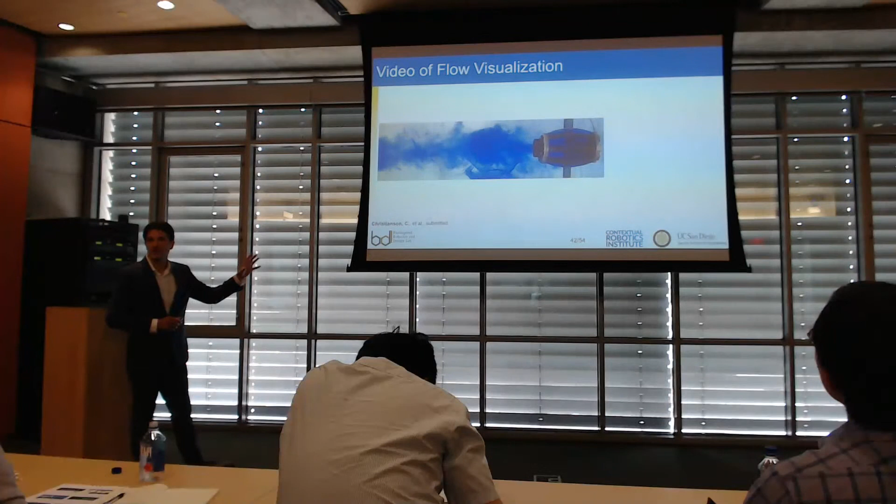Another way we can measure the efficiency or performance of the robot is through flow visualization. We inject the body of the robot with a dye that we visualize using a high-speed camera, at regular speed. Instead of a blue dye, we can also use a fluorescent dye to measure the vorticity that way.

Here are high-speed videos of the jet. In this case, the formation number is very high, so you have a stream of fluid moving so quickly that it doesn't have time to roll into a stable vortex ring.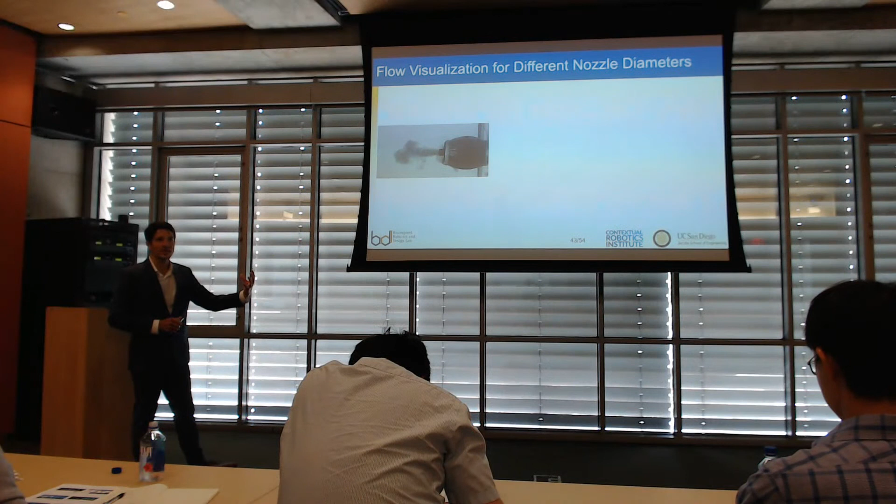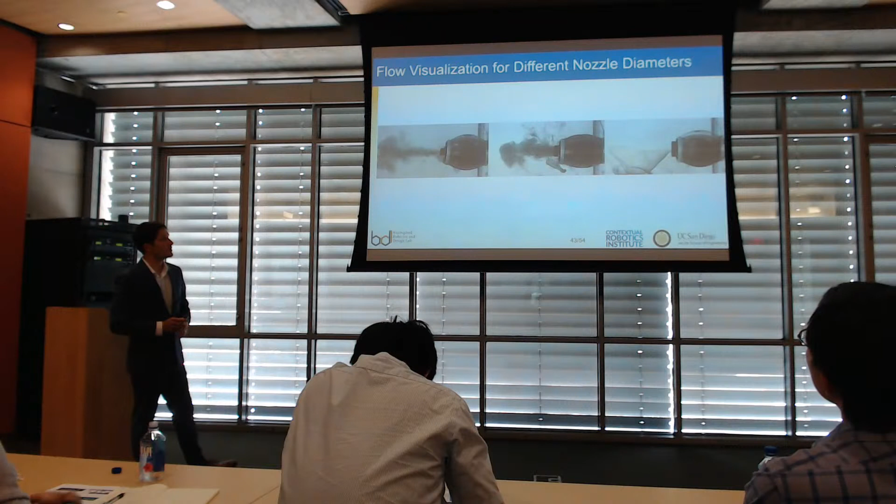For the middle case, it's closer to the ideal formation number, so you get a leading vortex ring that starts rolling up, but more fluid coming in behind leads to secondary vortex rings. In the final case, with formation number close to 4, we get a nice stable leading vortex ring, and almost all of the fluid that comes out is entrained in that leading vortex ring. That shows this is the most efficient configuration for the robot.

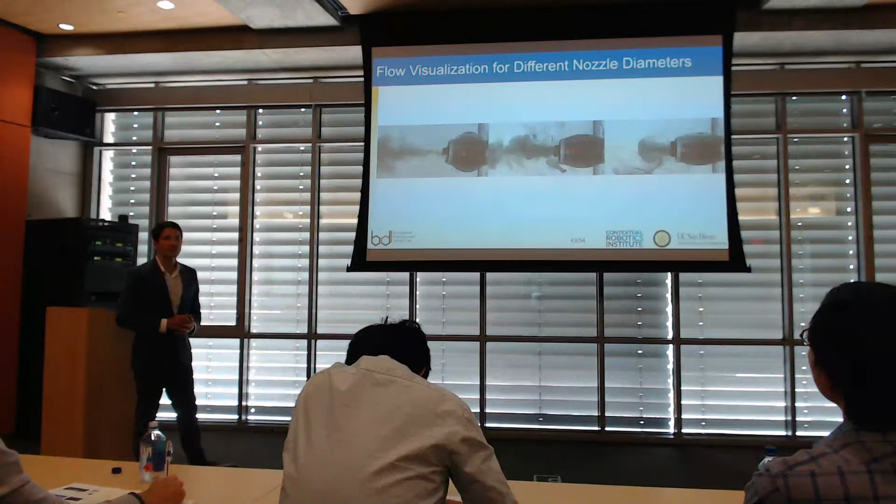Now that we've tested and designed the robot to have the most efficiency we can get, we want to make it untethered. I designed this waterproof housing for the electronics — just an acrylic tube with a waterproof switch you can turn on and off, and a clear dome at the front where you can put a camera or other sensors.

We also wanted to look at valves. In squid, they have one-way valves that direct flow to come in through one side and out through the nozzle, which is more efficient than having fluid come in through the back end and back out the same nozzle. So we wanted to see if we could make nozzles to get more thrust.

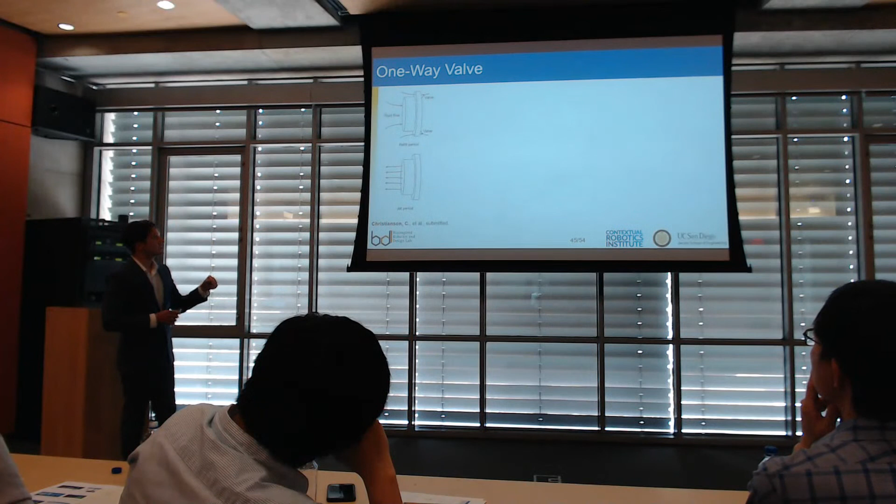This is a CAD rendering of the design — a simple design with small holes around the perimeter of the nozzle and a passive flap that controlled the direction. We measured the thrust for this: with the valve it was similar to without the valve at high frequencies, but we had better performance at some of the lower frequencies.

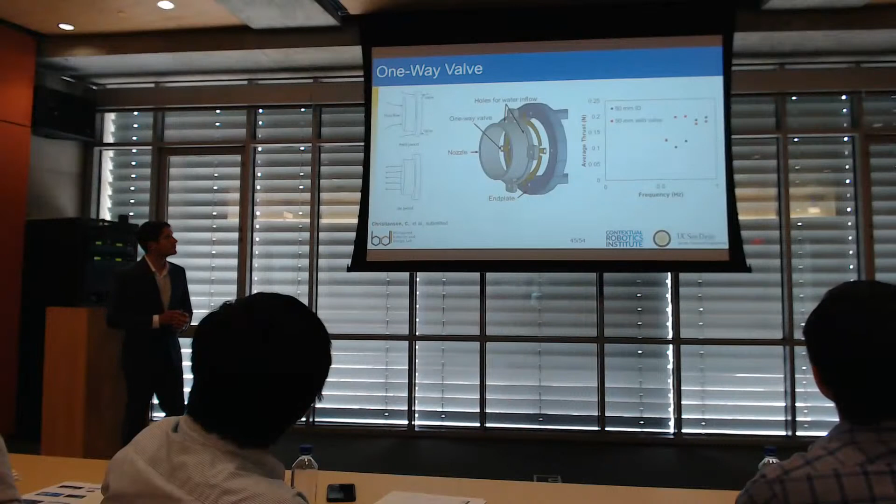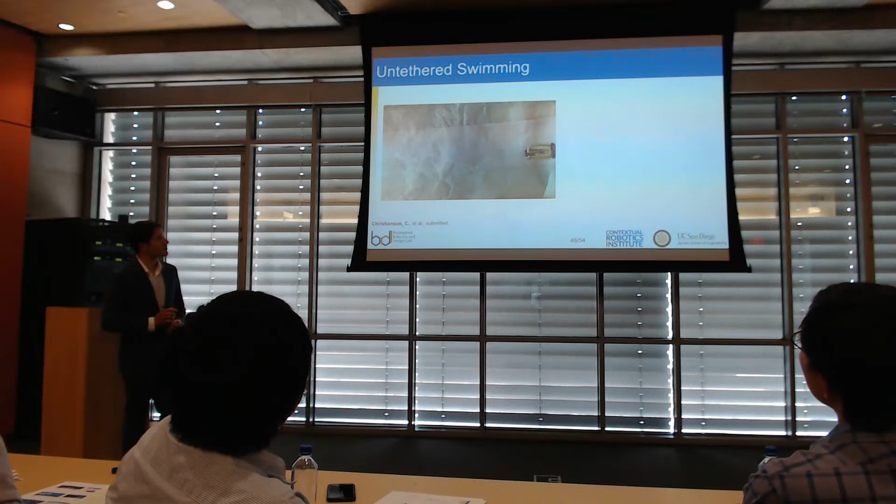Here's a video of untethered swimming. We have the waterproof power supply on the front of it, and it's swimming through the water. We can then measure the average speed per cycle as a function of formation number.

For very low formation numbers, you can see there's a trend where at low formation numbers it's slower, and at high formation numbers it's also slower. When formation number is close to 4, we get the maximum speed measured. The passive valve we designed didn't really improve performance, but we're still working on improving it for future work.

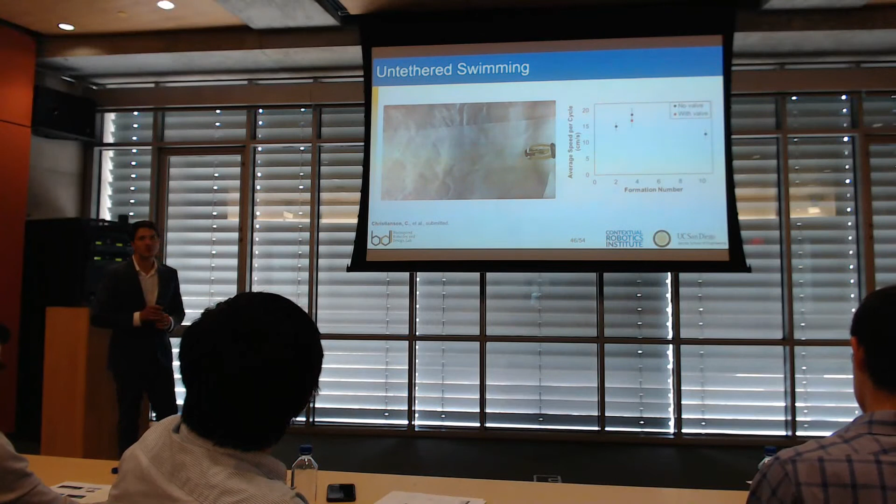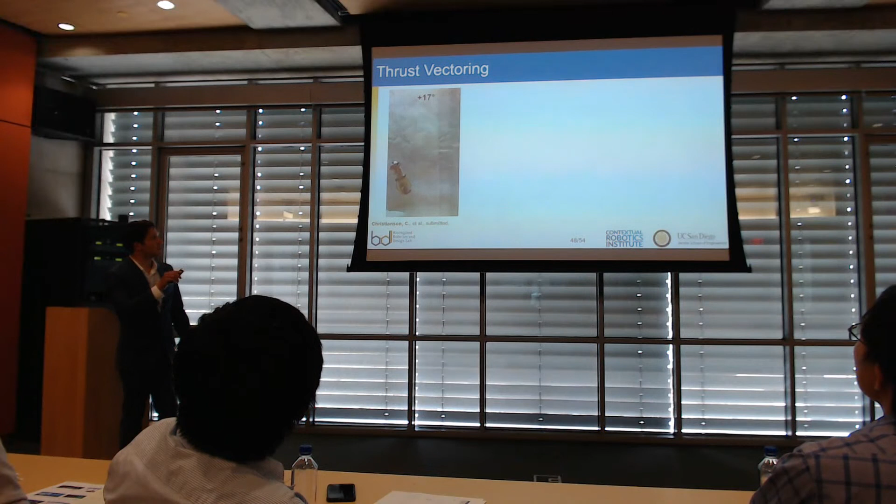With a 17-degree angle, we can get clockwise turning and a pretty big loop. If we have a nozzle that's twice the angle, we can get tighter turning, even turn on its head. And if we have it going in the other direction, we can get counterclockwise turning.

So there's just a proof of principle that we can steer the robot based on the angle of the nozzle.

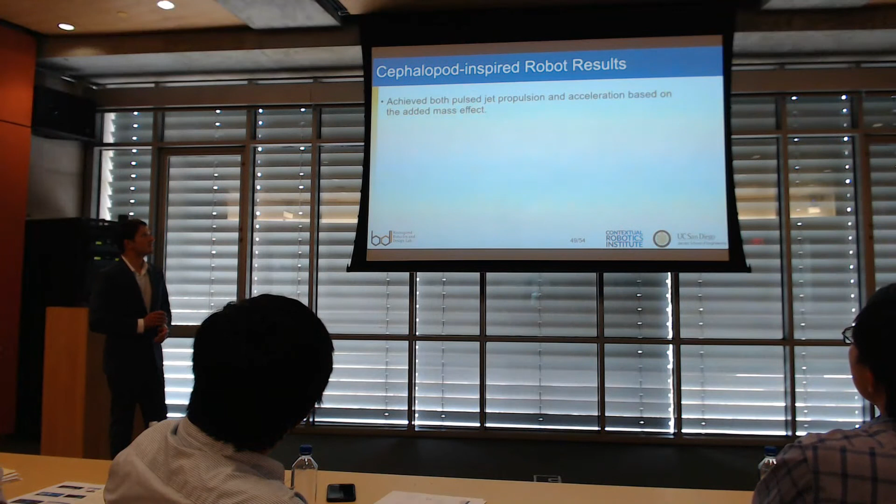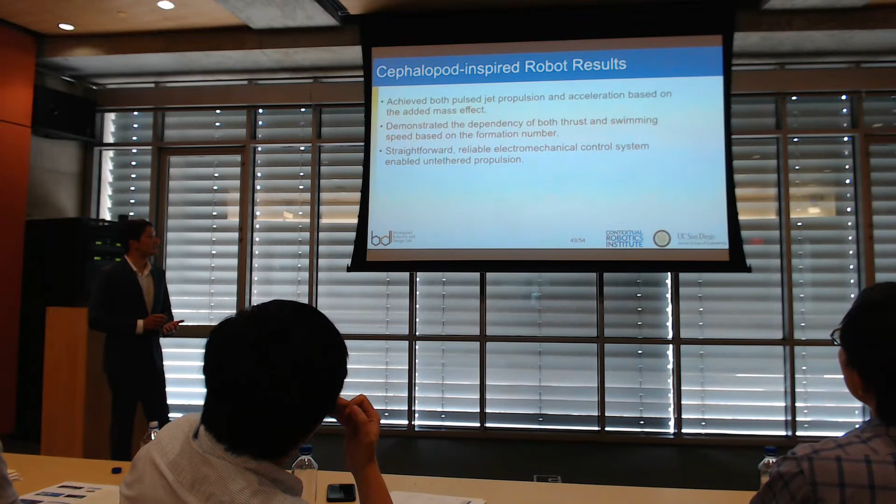So the results for this are that we achieve both pulse jet propulsion and acceleration based on the added mass effects, that we demonstrate the dependency of both thrust and swimming speed based on the formation number, that we developed a straightforward, reliable electromechanical control system that enabled untethered propulsion, and we demonstrated control turning through thrust vectoring.

As an overview of the 3 different projects, they went a little bit faster as the research went on. For the eel, the top speed was about 2 millimeters per second, jellyfish was 3.2, and cephalopod was 184 millimeters per second.

We can also measure that in terms of body length per second, which is another way of comparing it to different animals or robots, seeing how fast it moves compared to its body length. The thrust was similar for the eel and the jellyfish at 42 micronewtons, which is really, really small, and the cephalopod blew those out of the water.

For the input power, the amount of power it took to drive the robot, the jellyfish took 4 times less power than the eel did, showing it was more energy efficient. The cephalopod took about 7 watts. So in the cost of transport, we found the smallest cost of transport for the jellyfish-inspired robot. That increased for the cephalopod and was much higher for the eel, which was not optimized for swimming efficiency.

If you want to tune the robots, the first 2 are silent and can be translucent or transparent. So if you want something silent, we can use DEAs, or if you want something more powerful, maybe you want something like the cephalopod-inspired robot.

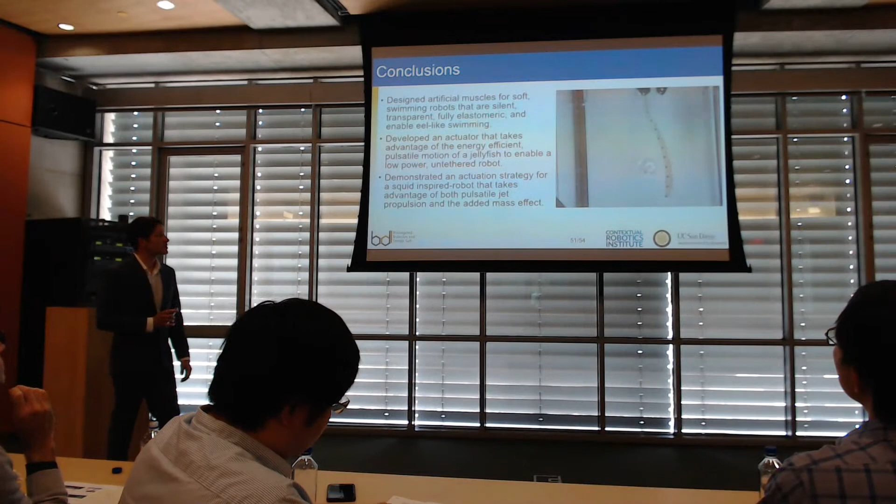So the conclusions are that we were able to design artificial muscle soft swimming robots that are silent, transparent, elastomeric, and enable eel-like swimming. We developed an actuator that takes advantage of the energy-efficient motion of jellyfish to enable a low-power, untethered robot. And we demonstrated an actuation strategy for a squid-inspired robot that takes advantage of both pulsatile jet propulsion and added mass effects.

So the future work for other people: for the eel-inspired robot, it would be nice if we were able to come up with an untethered platform for it, to see if we can improve the performance based on including prestrain, and also exploring the impact of fibers to improve the performance of the actuator.

One of the issues with the actuator is that it bends more towards one direction than the other, so our hypothesis is that if we include fibers, we can actually improve the ability of it to swim the same or better in both directions.

For the jellyfish-inspired robot, one of the key criticisms is that there's a lot of space in between the lappets, so you have a lot of fluid that slips between them. If we could decrease that distance, we could get more efficient propulsion as we can move more water around. Also, we could make it molded so we could start with a curved surface, like a hemisphere, as opposed to this planar approximation. I think we can make it better that way too.

And then for the cephalopod-inspired robot, looking at further optimizing the thrust and efficiency by improving the nozzle diameter and shape, since this is a very simple cylindrical nozzle. Also improving the selection of material for the skin and the ribs, developing a remote control and active steering for the project, and lastly implementing some sort of sensor payload.

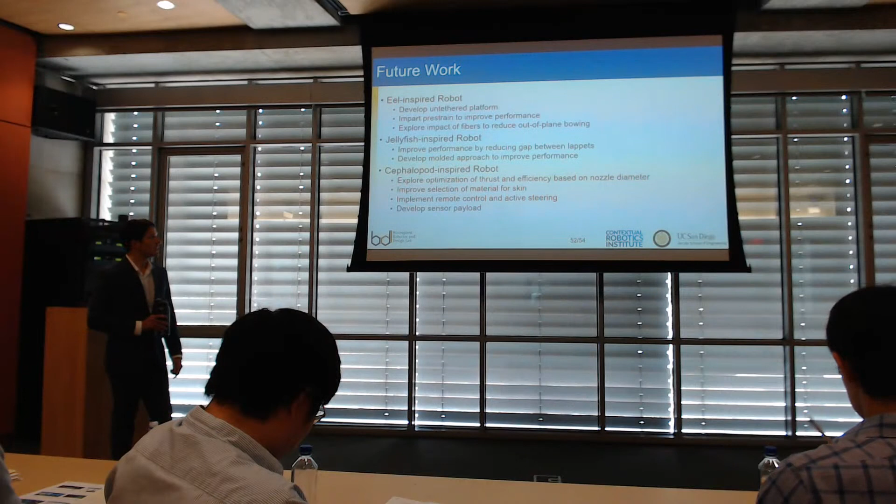So right now we just have a camera in it, but we could also use it for other sensors as well. That'd be really interesting.